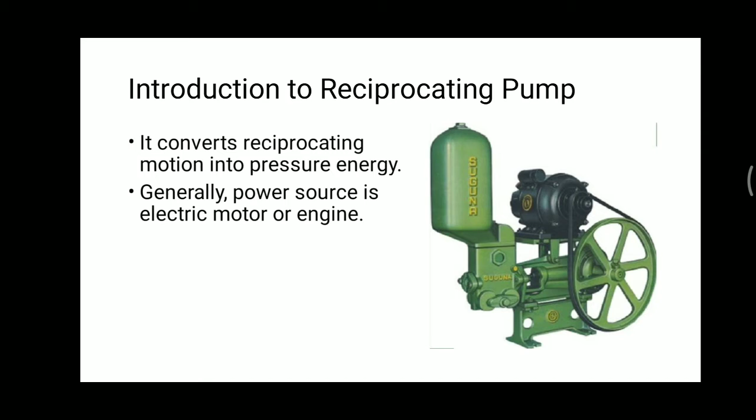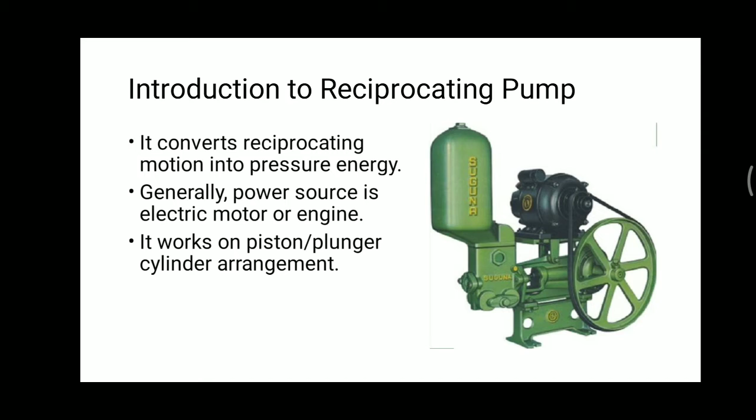Next point: generally the power source is an electric motor or engine, as I have already told you. It works on a piston, or sometimes a plunger is used, with a cylinder arrangement - piston-cylinder or plunger-cylinder arrangement - and with the help of that we can deliver water at a required height.

Now, principle of work: pushing of liquid by a piston that executes a reciprocating motion into a closed fitting cylinder. Then next, it has a crankshaft connecting rod mechanism.

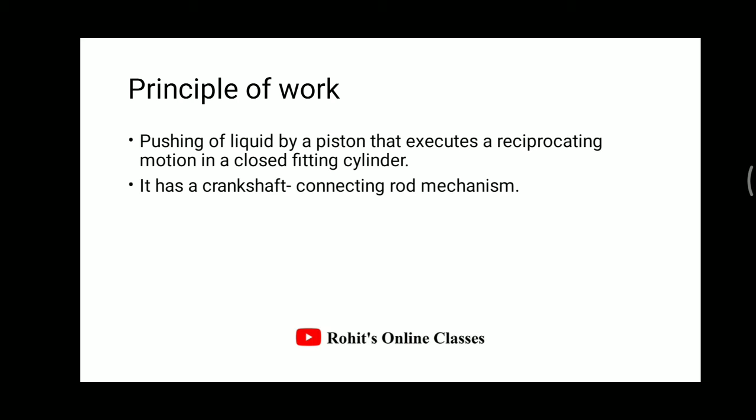As the piston moves towards the crankshaft, suction is created, and because of this suction the fluid is sucked from the reservoir. To get continuous output from the reciprocating pump, air vessels are used.

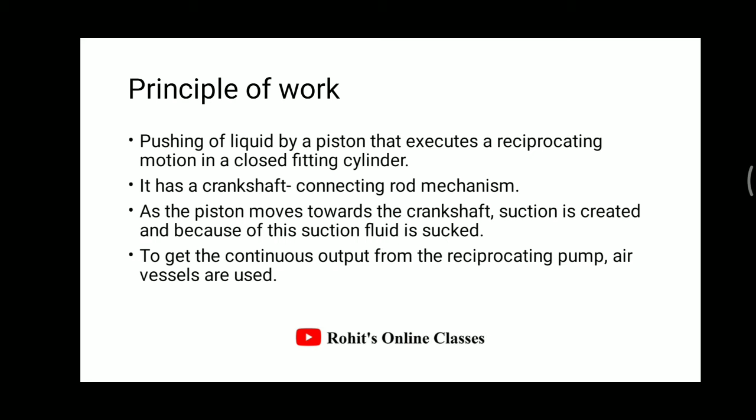Now I will explain how this principle, or how the working of this reciprocating pump is, in the upcoming slides of the working of this reciprocating pump. I will explain how this reciprocating pump works.

The next point is components of the reciprocating pump. In the diagram you can see there are different components. The first basic or compulsory components are the cylinder and piston.

Over here you can see a cylinder is there - this portion is the cylinder and this hatching portion is our piston. The similar arrangement you can see in IC engines also; IC engines will also have a piston and cylinder arrangement.

Then again the IC engine will also have the connecting rod, then this crankshaft. These are some similar parts of the IC engine and the reciprocating pump.

Again, in an IC engine you will have an inlet manifold and exhaust manifold. Similarly here the suction valve and delivery valves are present. The function of this suction valve and delivery valve is that the suction valve will allow the water to come in only.

If we try to put that water, or try to move the water away from the suction valve, then it is not possible. The suction valve only allows water to come into the cylinder.

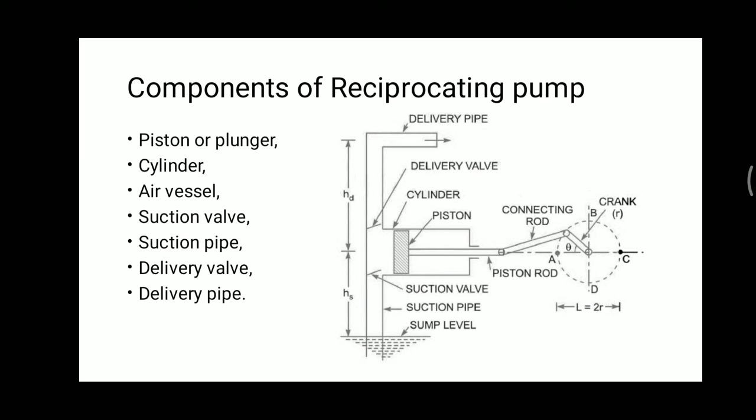Let us consider the piston is over here. This connecting rod and this piston shaft will both be in the extended position. The meaning is that when the piston is completely at the extreme position, let's say this is the left hand side.

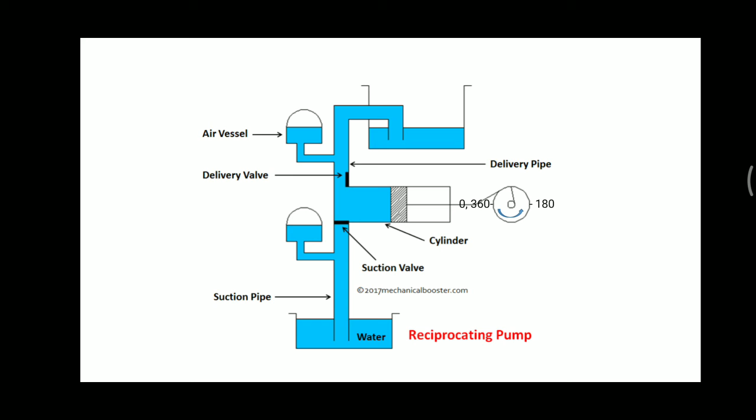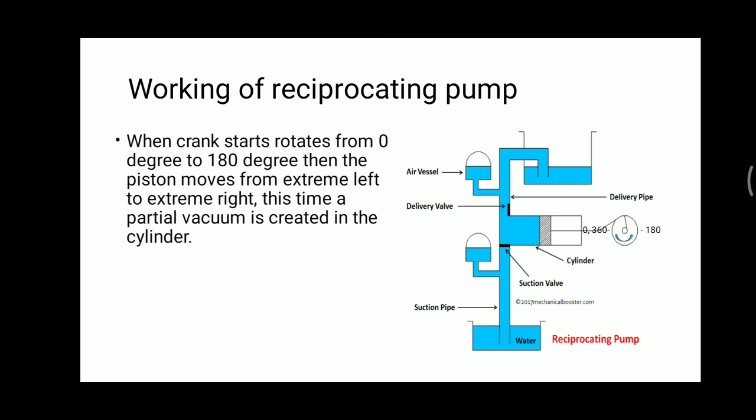Now the points that we have discussed are mentioned in this slide. When the crank starts rotating from 0 degree to 180 degree, the piston moves from extreme left to extreme right. At this time, a partial vacuum is created in the cylinder, which you can say is suction.

Due to this suction generated into the suction pipe, the suction valve is open and the delivery valve is closed. This diagram shown is for the delivery stroke. So in the suction stroke, the suction valve is open and the delivery valve remains closed, and the liquid comes into and fills the cylinder, which is known as the suction stroke.

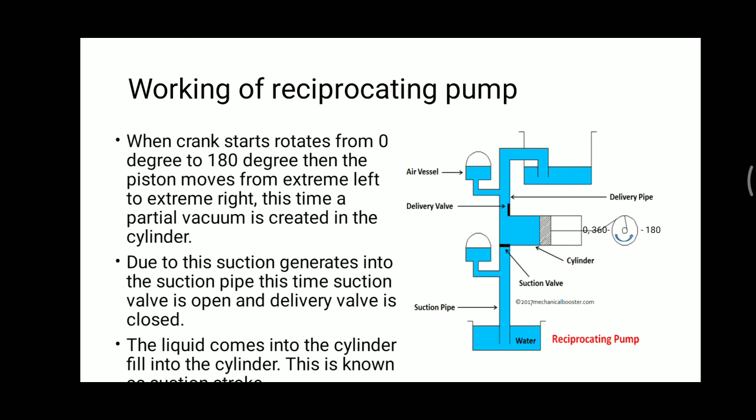Then next, when the crankshaft rotates from 180 degree to 360 degree, the piston moves from right to left, as shown in this diagram, the piston is returning from right side to left side. During this stroke, this movement causes the pressure to increase into the cylinder above the atmospheric pressure.

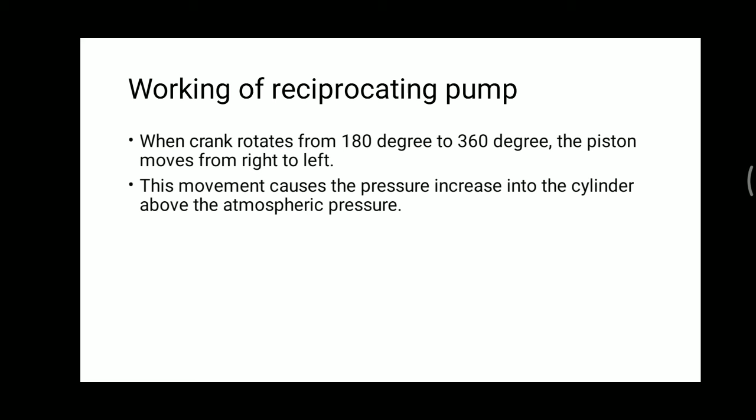The pressure will increase above atmospheric pressure, and because of that, the suction valve remains closed and the delivery valve remains open. The liquid is forcefully pressed and delivered at the required height, and this is known as the delivery stroke.

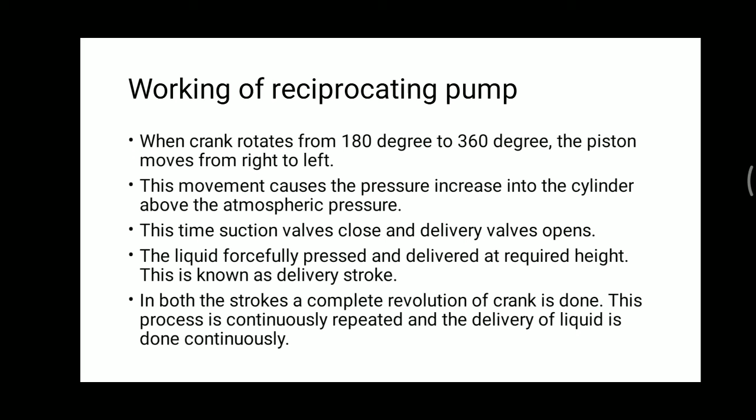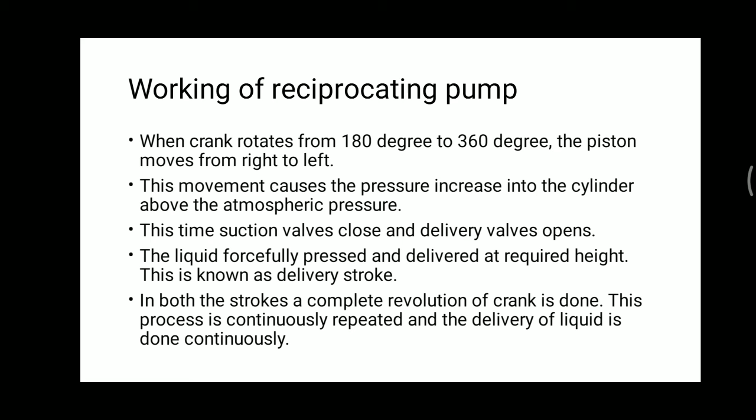In both strokes, a complete revolution of the crank is done. During the suction stroke and delivery stroke, 360 degrees of crankshaft rotation is completed. This process is continuously repeated, and delivery of liquid is done continuously.

Now this is one of the animations that I will show you. So the animation will look like this. You can see this is the animation of the reciprocating pump.

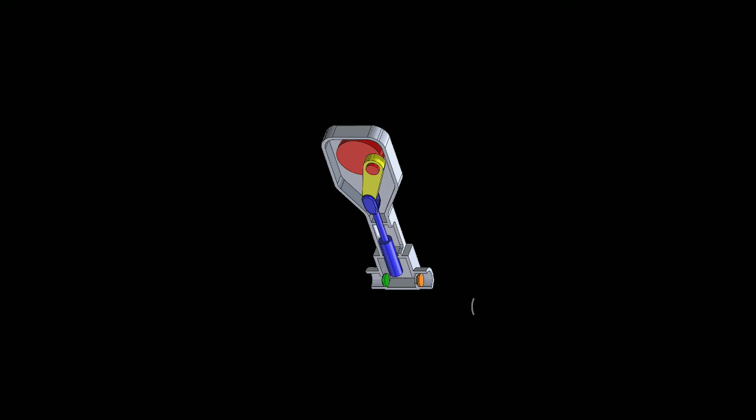Now in this video you can see the green colored portion is the suction valve, the saffron colored portion is the delivery valve, red is our crankshaft, the yellow colored part is the connecting rod, and the blue colored part is our piston, or you can say it is a plunger. Now you can see the piston is returning, or the piston is coming back.

During this, suction is created, and during the suction the green valve will shift and water is allowed to get into the cylinder.

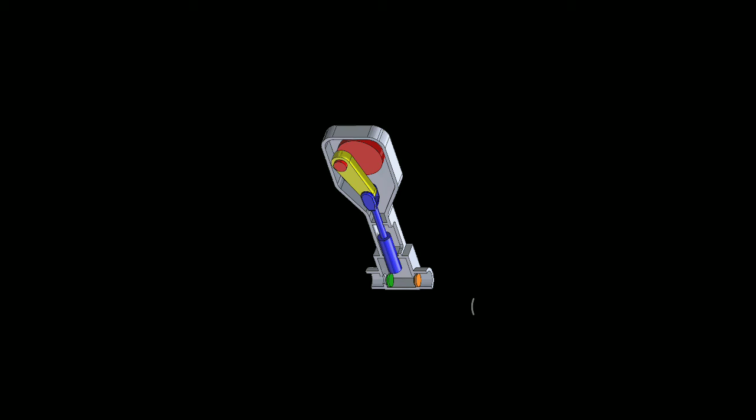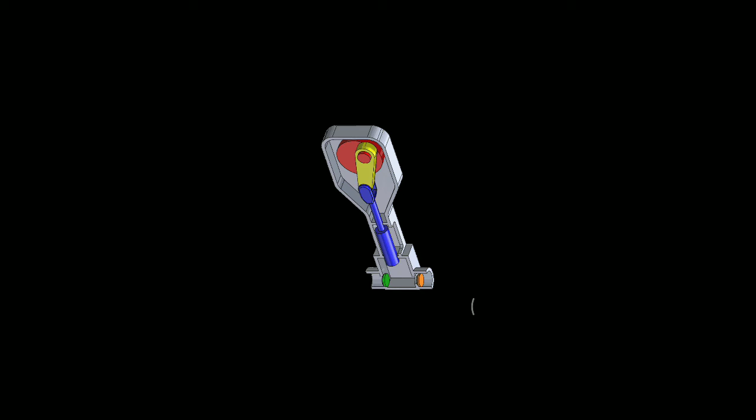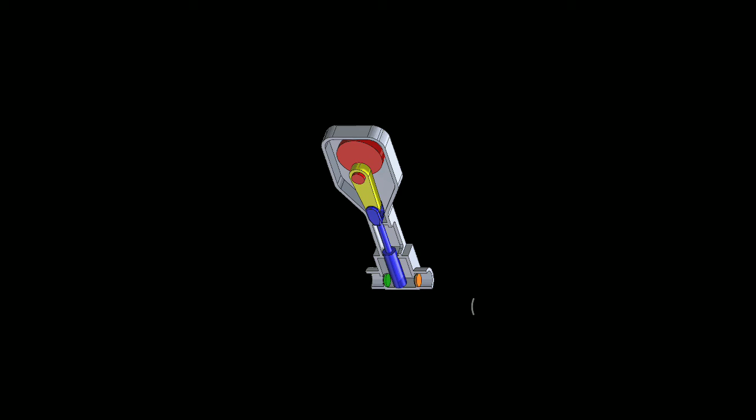Now the piston is in forward motion. During this, a pressure is exerted on the water and water will get pressed, and because of that pressure the delivery valve, the saffron colored valve, will get opened and water will get delivered into the tank which is located at the higher level.

So this is the working of the reciprocating pump. Now we can see the important components of the reciprocating pump.

First is the piston and cylinder. The piston moves to and fro into the cylinder, that is the piston reciprocates inside the cylinder. That's why the pressure below and above atmospheric pressure is formed, correct?

If the piston will not reciprocate, then what will happen? It will not create the suction and it will not create the pressure also. So that's why piston and cylinders are important.

Then comes our next components, the crank and the connecting rod. The crank makes a circular motion, and the purpose of the crank is to convert rotary motion so that the piston moves into reciprocating motion. So the piston moves into to and fro motion when the crank is rotating, and this is done with the help of the connecting rod.

So the rotary motion of the electrical motor will be fed to the crank, and that rotating crank will be connected to the connecting rod, and that connecting rod will reciprocate into the passage which is provided behind the cylinder, and into the cylinder the piston will reciprocate, which is connected to the connecting rod.

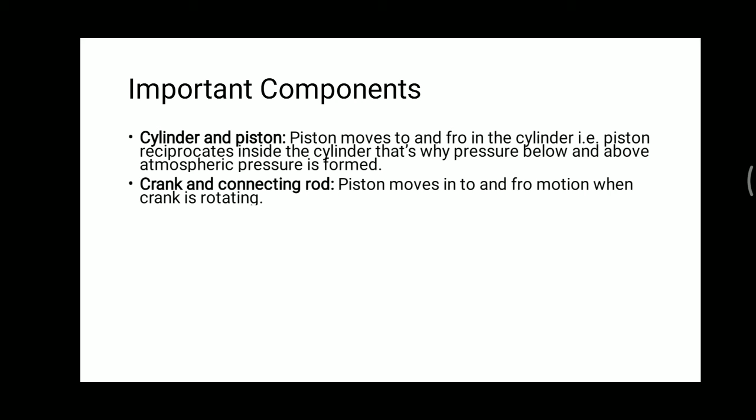Now the suction pipe, you know what is the purpose of the suction pipe. The suction pipe is connected to the cylinder and the source of water, so it transmits water from the source to the cylinder. This is the connection link between the reservoir, or you can say the source of water, and the cylinder.

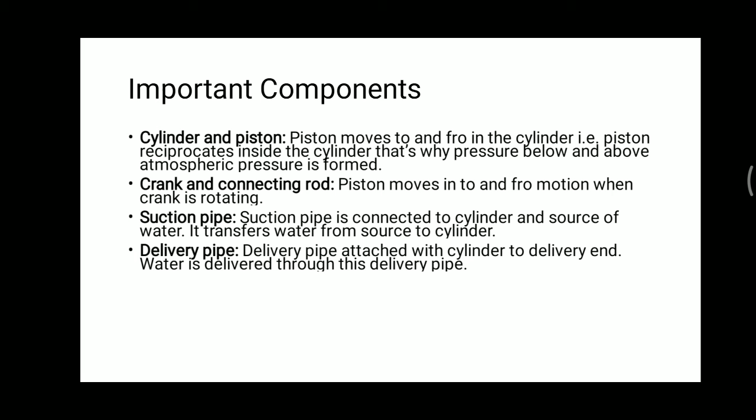Then the delivery pipe, attached with the cylinder, delivers water to the delivery end. If the delivery pipe is absent, then what will happen? The water will get out of the cylinder and fall onto the ground. So the delivery pipe is the connection link between the cylinder and the higher level water tank.

Then the suction and delivery valves. The suction valve allows the liquid to enter the cylinder only, and the delivery valve permits only delivery or discharge of liquid from the cylinder.

The suction valve will allow flow only in one direction, it will only allow water to enter into the cylinder. If water gets out of the cylinder, then that valve getting open is our delivery valve. These two are non-return valves.

Suction valves and delivery valves are non-return valves. Only forward journey of the fluid is possible; return journey of the fluid is impossible during this process of suction and delivery.

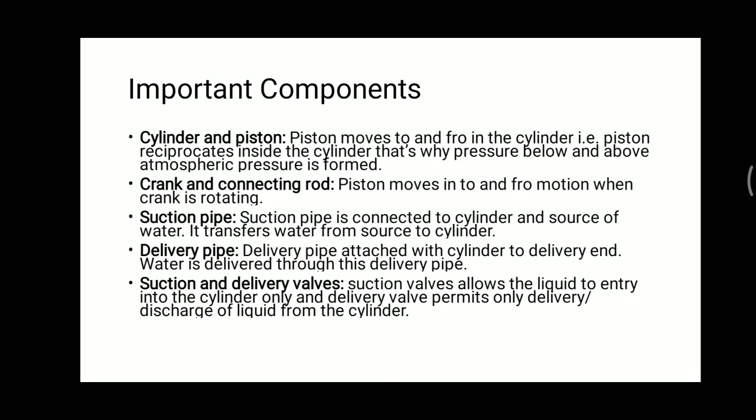Now the air vessels, which are again important parts in the reciprocating pump. Without air vessels we cannot operate, or we cannot get continuous output of water.

Air vessels are mostly used in case of a single acting reciprocating pump. In the working of reciprocating pump, air vessels are only important for the single acting pump. If we are installing a double acting pump, there is no need of air vessels. It is used to obtain continuous supply of liquid at a uniform rate from a single acting pump, and it helps maintain a uniform rate of flow of liquid in both suction and delivery. So that's why these air vessels are important.

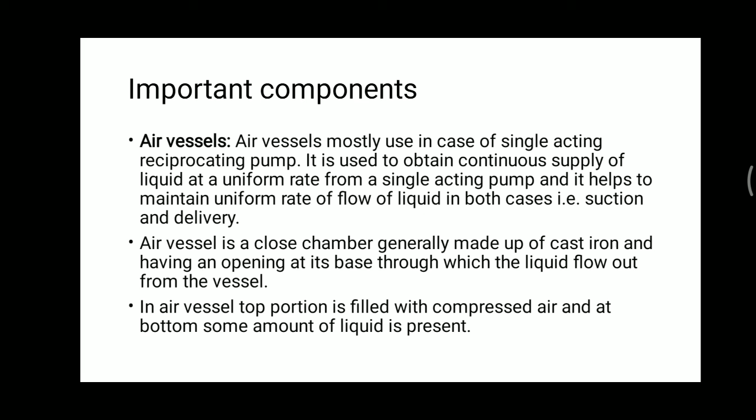An air vessel is a closed chamber, generally made up of cast iron, having an opening at its base through which liquid flows out of the vessel. The air vessel's top portion is filled with compressed air, and at the bottom some amount of liquid is present. So this is the air vessel's function.

If the air vessel is absent in a single acting pump, what will happen? We will get a fluctuating discharge of water. To get continuous discharge of water, we will have to install air vessels, or we have to go for the double acting reciprocating pump.

Now the performance curves for reciprocating pump: how the reciprocating pump performs for discharge against head, for overall efficiency against head, and for discharge against speed.

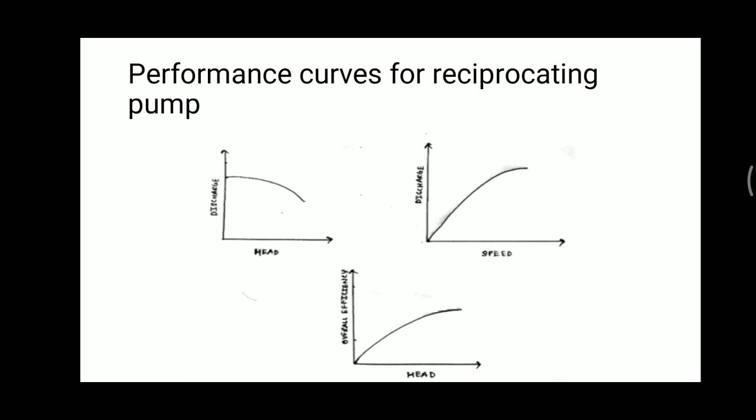In the third graph, as we increase the head from zero to a certain level, the overall efficiency is gradually increasing. So these are the performance curves for the reciprocating pump. Using these curves, we can track the performance of the pump.

Now the last portion of this video: applications of reciprocating pump. Generally, agricultural use of reciprocating pump is more, then chemical industries, desalination industries, horizontal drilling, general industries, mining, oil and gas, and pulp and paper. So these are the applications of reciprocating pump.

We can use reciprocating pumps in chemical industry. Generally, a reciprocating pump has a piston and cylinder arrangement, and the piston reciprocates inside the cylinder. The piston and cylinder will have a very precise clearance between them, and if the clearance increases, what will happen?

A little amount of pressure will get released. So to get a certain value of pressure, we must put a very precise clearance between the piston and cylinder.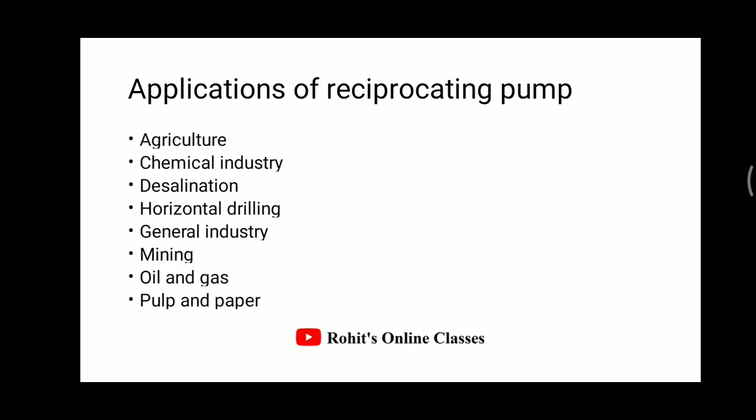So in order to use this pump, we must use very pure water, without any contaminants like mud or soil particles, because those particles or small stones will remain inside the piston and cylinder arrangement. Because of that, the whole assembly will get jammed and the reciprocating pump will not work properly. So that is one of the limitations of the reciprocating pump.

In steel industries also, we can use this reciprocating pump in order to pump clear or pure water. So this was about today's video, which is regarding the reciprocating pump.